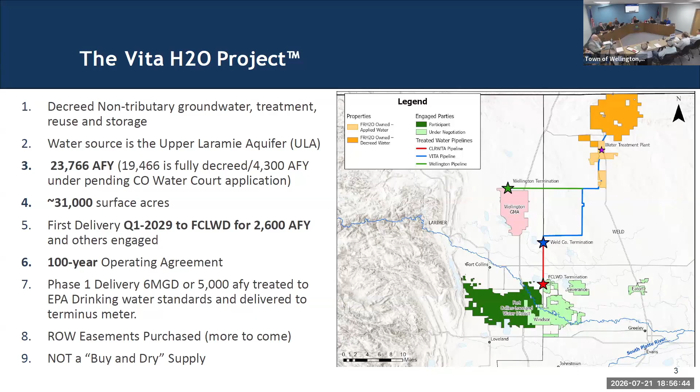Let's talk about the ULA quickly. It's unaffected by drought and hydrological variability. This roughly starts about 150 feet down and goes all the way another 600 feet, so total depth to our wells will be about 800 feet—some a little deeper up on Lazy D, just because it's the higher elevation.

The consistent water quality, as I said earlier, it's an ancient water quality. It is very, very good water. The one element is the uranium, but it measured out fine in our full test. We have done thousands of tests and our pilot treatment test.

We essentially followed very much what Greeley did with Terry Ranch—it's the same team, the LRE team, Spheros is formerly LRE. So we followed the same path, didn't try to reinvent the wheel. We just completed that, and as I told Meagan, those reports we'll be glad to share with you guys: full piloting of the WRT technology, plus lots and lots of lab results from all our wells, which I'll talk about in a minute.

Very good water. Again, conjunctive use—I've said enough on that. It does allow incredible flexibility, reliability, and firming. As I said, the water is bankable, so it's stored until needed. We've talked about the extent of reuse and recharge, and again, fully consumable water supplies. This is a consistent theme.

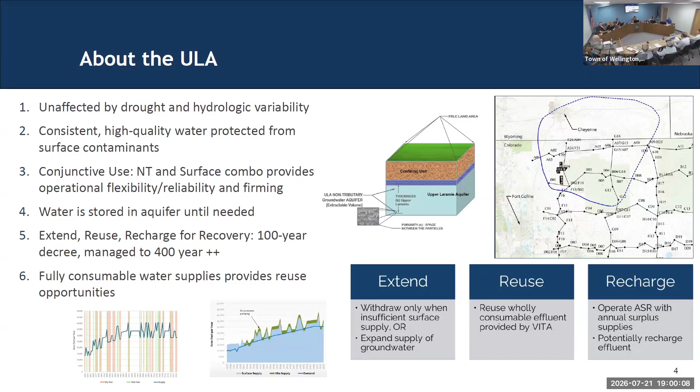Project design highlights - some of this I've already talked about. The average total depth is around 800 feet, and we'll manage them in the 400 GPM range.

We've got a really good hydrology team. Fort Collins Loveland Water District brought on Tom Sayer, if you guys know him. He's pretty well respected and well known. We're glad to have Tom on the team, so that's all part of the well design group. We're really happy to have him.

As I said earlier, the wells are being designed bidirectional and designed with ASR. One of the things in a classic groundwater well is you can use silica sand to pack around the filters that suck the water in, or you can use glass beads. Glass beads are specifically designed for ASR, so it's friendly to reverse the pumps and push the water back into the system. We're going to use glass beads, which are more expensive, but that's what it means about the wells being designed for ASR in the future.

The main trunk line, the blue line I mentioned, is 24 MGD. Again, it's gravity fed. The good news at least to Wellington is that can also be gravity fed, so we'll have the pumps pushing, but it'll be gravity fed.

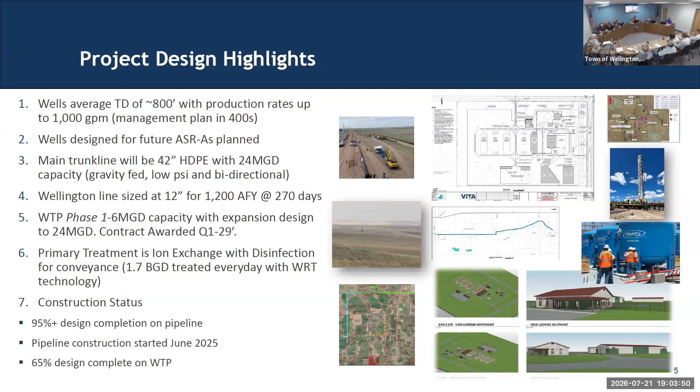One of the rules we have is: look out for the blind spots. And by the way, check your ego at the door. Our team is really good at that, and I'm pretty proud of them for it.

That's it. I want to emphasize, I have lots and lots of technical data and good reports, and some other slides we can share as part of the backup, but Meagan said I had 15 to 20 minutes, so I tried to keep it as short as I could. We're open for questions, and certainly can go back to anything else you guys might have.

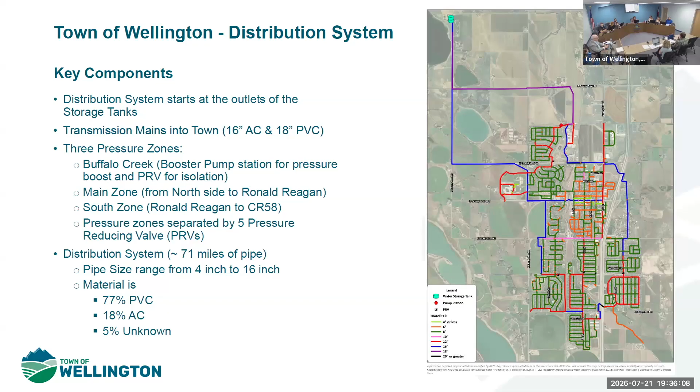One of the great things about our system is it's mostly made up of 8-inch or larger PVC pipe. Smaller diameter pipe, 8 inches and less, is typically the older pipe. That's where we see a lot of our asbestos cement pipe, specifically within Old Town. All the new developments have PVC pipe, which is great. That's the industry standard. The AC pipe is what we'd be looking to phase out over time.

Before I get into the project scope, I want to touch briefly on what a distribution master plan is supposed to be. It is a long-term planning document that provides an assessment of the existing distribution system in terms of existing capacity, operational efficiency, as well as looks towards future growth scenarios and identifies potential operational and hydraulic deficiencies, and lastly, develops capital improvement projects to support long-term growth and remedy those identified deficiencies.

That being said, the scope of this project had 3 main tasks. We had a water model update and calibration, and then we had water system planning, which consisted of several tasks that I'll discuss in the coming slides. And lastly, we had the master plan report.

Starting with the water model update and calibration, the original water model was prepared back in 2020 using existing GIS data sets and limited water meter data, customer information, consumption data. The model update effort upgraded the software to the current modeling standard and revised and updated the demand allocations within the model based on customer usage data and plant production data.

New diurnal curves were developed based on the usage data. Diurnal curves, which you'll see here on the slide, show the usage of water throughout a 24-hour period. The idea behind them is that usage is not constant, but that people and systems use water in a very predictable pattern that can be applied within the model to vary demands throughout the day. It is typical to have multiple diurnal curves within your model based off of the scenario that you're running. In our case, we have diurnal patterns for winter usage and summer usage, as well as average usage. And the key difference there is obviously your irrigation demand in the summer.

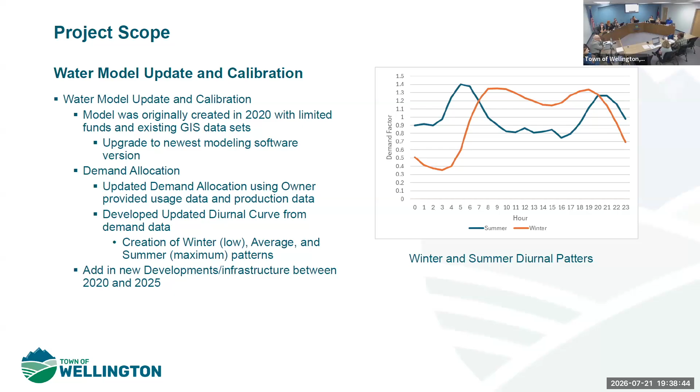The model was also updated to include new developments that have occurred between 2020 and 2025, and it also included an update to the hydraulic characteristics of the main treatment plant as well as the nano facility. When the model was originally developed, I didn't have funds to go in detail there, so I said just put a valve and say the production is X. And now we've got pump curves and everything else in there, so it's more realistic.

Moving on to calibration. The model is calibrated in a number of ways, but the most basic is to open up a hydrant and run it. Put a flow meter on it, measure pressures throughout the system, and we take those numbers back, send it to the consultant, and then they compare it to the model results for the same hydrant flow. And you hope that they're very similar. If not, you adjust the model.

Once calibrated, the model scenarios are then built, which in this project included a maximum day, which would be sometime in the summer, minimum day, which is typically winter usage, average day, which I call shoulder season, that's spring, fall usage. And then we have our two future growth scenarios of 2030, which at the time was intended to be a 5-year scenario - now it's more like a 4-year scenario - and 2045, which is a 20-year scenario.

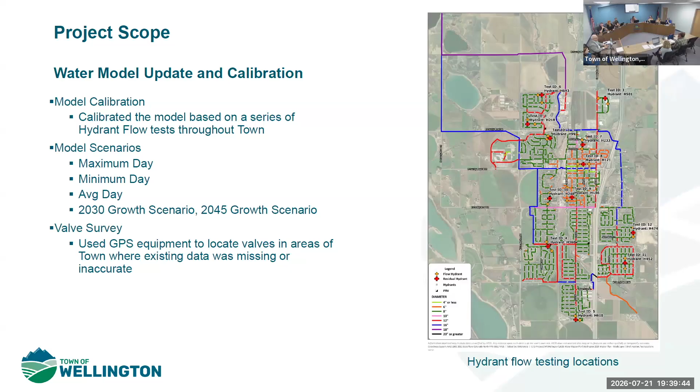The water system planning task started with an existing conditions analysis. The consultant looked at key information for the distribution system, including pipe age, break history, and pipe material. We always knock on wood when we say break history, because we don't really have a lot of it.

Through the various model outputs, the consultant is able to review the hydraulic performance of the system, looking at key indicators, primarily velocity. Velocity is an indicator of excessive head loss within a system. You want lower velocity and larger pipe for less head loss, so the lower your velocity, the better performance. You typically look to have 10 feet per second or less, otherwise you need to upsize your pipes.

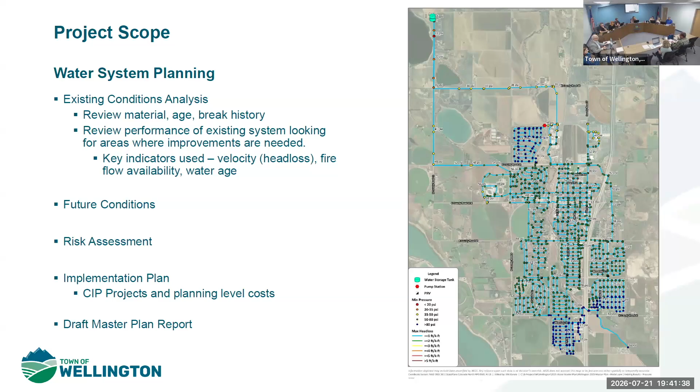They also looked at fire flow availability and water age. Included with this planning task was the development of future conditions growth scenarios created in the model, which we'll detail in coming slides. They also completed a risk assessment, which was one of the easier tasks. With a relatively new system and minimal break history, nothing major was found other than the older AC pipe throughout Old Town. As part of this task, they came up with an implementation plan identifying projects to accommodate future growth and address issues in the existing system. Lastly, there's the master plan report, which will be finalized after this presentation.

So let's talk model results.

Starting with the existing conditions analysis, the good news is there aren't really any major deficiencies identified other than the older, smaller diameter asbestos cement pipe within Old Town. There are two minor deficiencies, which I'll talk briefly about: the Buffalo Creek pump station, and a pressure zone issue down in Sage Meadows.

The Buffalo Creek booster station is located north of Wellington Community Park, in a small fenced-off building you wouldn't recognize. As mentioned previously, it provides boosted pressure only to the Buffalo Creek subdivision, which is separated by valves from the rest of the distribution system. The pump station is what I'd consider a dumb station: there's no control logic, no motor speed controls. It's either on or off, and controlled daily by C&D staff with manual switching of the duty and standby pumps. There's no SCADA remote control or visibility on this station, so we rely on manual operation and daily interaction to keep it functioning.

The operation of this pump station isn't ideal, but if and when growth occurs to the north, new pressure zones would be developed, and the intent would be to phase out this pump station.

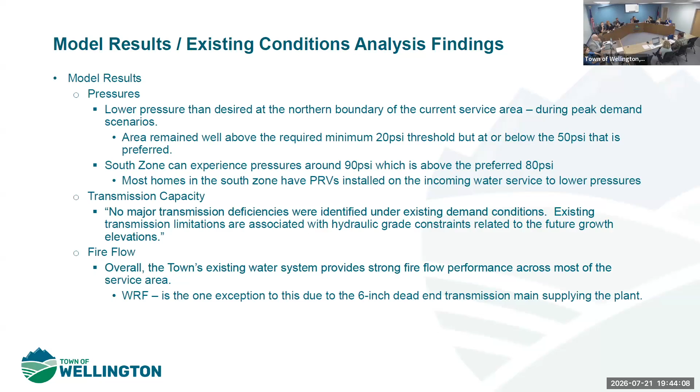Now moving on to the future growth scenarios. These growth scenarios are referred to by the year 2030 and 2045. They were developed using future land use maps in conjunction with the demand projections developed in the 2024 West Water Demand Analysis. Future land use classifications were mapped to a water use classification, and the demands were applied within the model using the best estimated location of that growth.

For the 2030 scenario, we assumed growth area number 1 would be the most likely to occur within the next 5 years. So 2030 looks at areas for growth much closer to town limits, with 2045 looking at growth further north between current town limits and Owl Canyon — that would be growth areas 2 through 4.

In addition to the future growth scenario, we included an analysis of the potential to accommodate an alternative water supply, the VITA project, which you just heard about, entering the town from the north. The analysis included consideration of the infrastructure needs to fully utilize and integrate this alternative source within the distribution system.

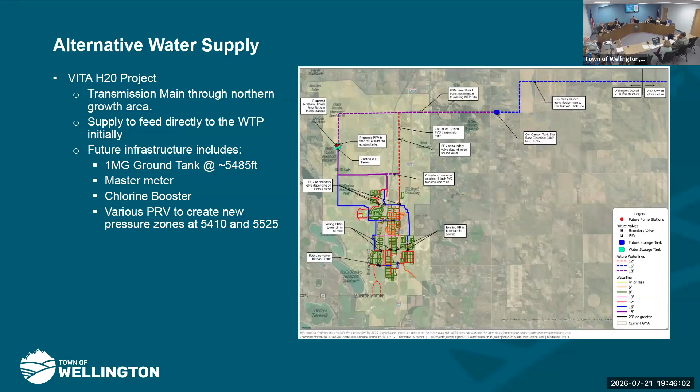Moving on to project recommendations. The 2030 scenario doesn't have a slide.

I'm intentionally not discussing these in detail because, as previously stated, the existing distribution system doesn't have many issues. There's the South Zone PRV issue that I mentioned, and then there is the need to plan for the aging asbestos cement pipe. But the great thing about AC pipe is if you keep using it, keep it wet, and don't bother it, it usually behaves itself. It doesn't break. We don't have a big break history here.

But the plan should be to budget for the replacement each year, just some percentage, so you don't fall behind. The work, in theory, should coordinate with other utility and infrastructure work to share the cost of road repair between the projects and the various funds. Typically with utility work, you see your biggest expense coming from putting the road back together, which is interesting.

Project recommendations for the 2045 scenario. These projects were developed to meet the needs of growth while also being able to function with or without the VITA project. Two new pressure zones are needed at hydraulic grade of 5410 and 5525. To serve these higher pressure zones, the master plan recommends a new pump station at the water treatment plant. This would create a pump zone similar to the way that Buffalo Creek operates now, but with pumps sized for peak demand and fire flow.

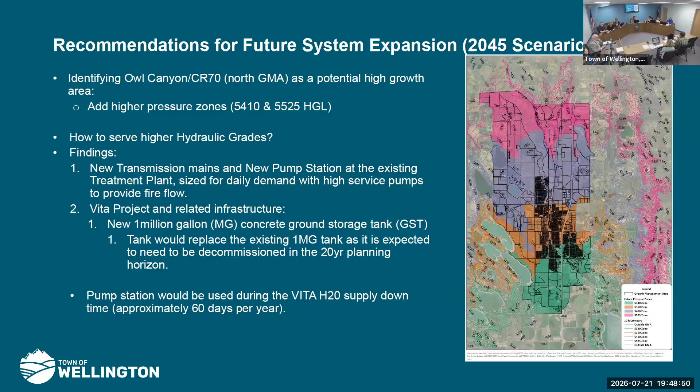All of that leads us into our recommended capital projects. In the near term, 5 to 10 years, budgeting for the yearly replacement of the older asbestos cement transmission main and the distribution pipes. There is a need for the new PRV down in the Sage Meadows area.

I hadn't mentioned this before, but it is in the master plan. There is a project shown as additional looping of distribution lines under the train tracks south of the proposed Sage Farms project.

This is envisioned as a development-driven project. It's not something that is necessary. It's nice to have if development occurs on both sides of those tracks, we'll want that. There is a future sanitary sewer outfall that is being looked at currently going under the tracks, and I would envision that if you're going under the tracks once, you do one permitted project and get both of those pipelines permitted at the same time.

Like I said, that's really a kind of a development-driven project, so it's not something that I spoke a lot about.

In long-term growth, what we're looking at is the Northern Growth Area Booster Pump Station. We would also envision decommissioning the Buffalo Creek Booster Pump Station. There are the various VITA transmission mains, which you can see on that drawing there to your right.

There's the Northern Pressure Zone PRV stations, and there's the continued budgeting for replacement of the asbestos transmission main and the distribution pipes. There's also the decommissioning of the 1 million gallon storage tank, as well as a new 1 million gallon ground storage tank somewhere along the VITA pipeline.

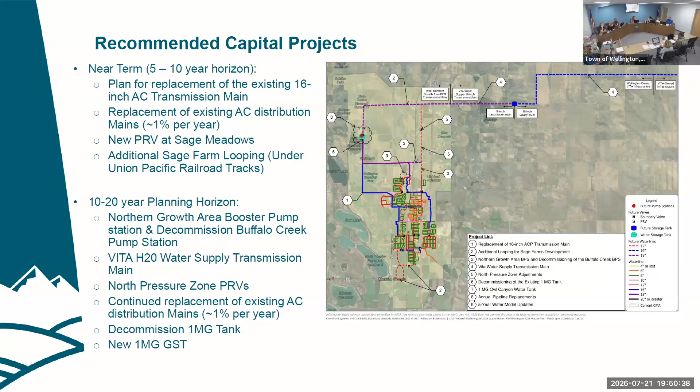With that being said, I'll stand for any questions or comments.

I'm so very happy that we are doing a working session on both of these items at the same session, because it kind of puts a whole picture together. So I appreciate that. The first thing I want to say is the word asbestos always makes me a little nervous, but I'm glad to hear that that's not necessarily a risk. But planning to replace that sounds great.

I live downtown. My water seems fine. And then I guess the other thing is it's constantly in the news all summer long. I follow all kinds of different towns and cities around Colorado and beyond, and it's like water main break after water main break. So I'm just curious, obviously that hasn't been the case now, but what happens when that occurs?

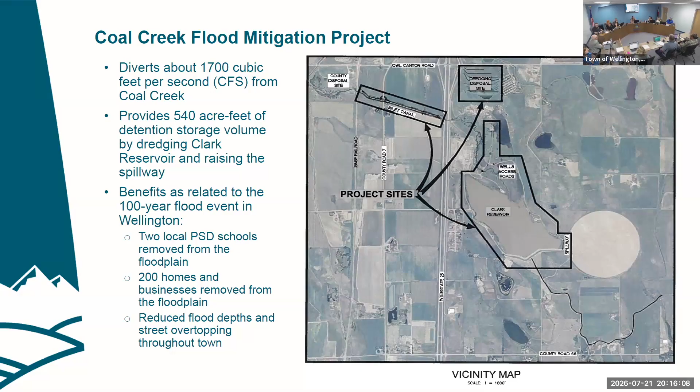What made that possible was enlarging the Inlet Canal. Both of those facilities are owned by North Poudre Irrigation Company, so they were something of a partner on these original projects. I'll talk a little more about the Inlet Canal specifically.

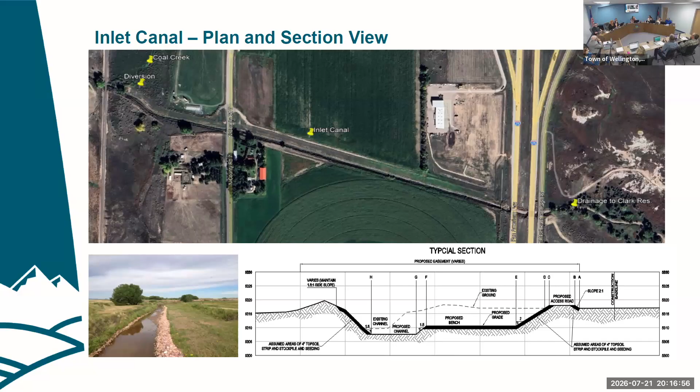Once it gets there — you can see on this map, that's Owl Canyon just to the north, that's the interchange of Owl Canyon you're looking at — it discharges east across I-25 and over to Clark, which isn't a whole lot to see in this one.

The project in Clark itself included dredging a lot of material. It's basically a wet pond, a retention ditch, a water supply reservoir, and raising the spillway a little bit to create more volume. All that detention is required in order to release those flows, which used to come to Wellington, safely to a point south on the east side of the freeway.

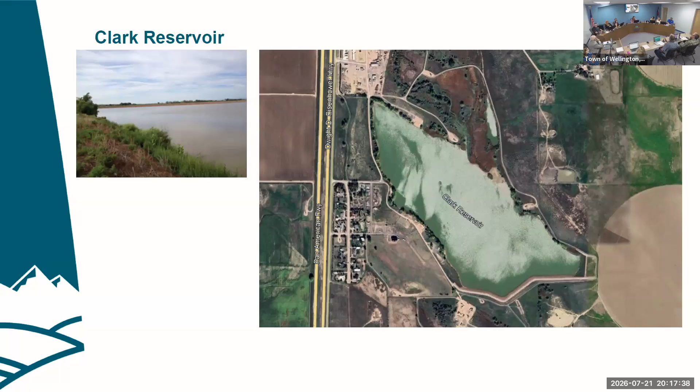So sometimes you hear those called the upper basin improvements. I really just think of them as our improvements.

So all of these projects benefit Fort Collins, Larimer County, and to some degree Timnath. But it's really only those upper basin projects that benefit us, which led us to 2017, when former town administrator Cannon and Mayor Tim Singwald put together that 2017 agreement and got it approved.

What that 2017 agreement does is limit our financial responsibility for the East Side Detention projects, and also lay out a path to ultimately dissolve the authority once certain conditions were met.

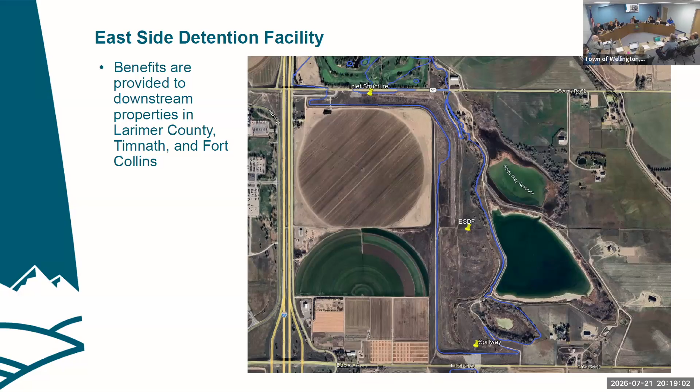Those conditions are quite lengthy, but in general they include completing the projects, paying off any loans — there were some CWCB loans taken for the projects — and distributing assets of the authority back to the members.

Remember, this is how it's set up: the members — those three entities in the original IGA — hired the authority to run it for them. So it's the members that need to dissolve the authority, because we're the ones that signed the IGA.

So our representatives on the board of directors have been talking for quite some time about an early termination to the authority. I think you've all heard those conversations. About, I'd say 6-8 months ago, the audit committee was tasked with working through all the requirements to actually do that.

And the audit committee previously had a pretty limited role. It was really to review the audits and advise the members and the authority. But that mission has changed a little bit, and we are starting to look at what it would take to dissolve. There's going to be some real challenges here.

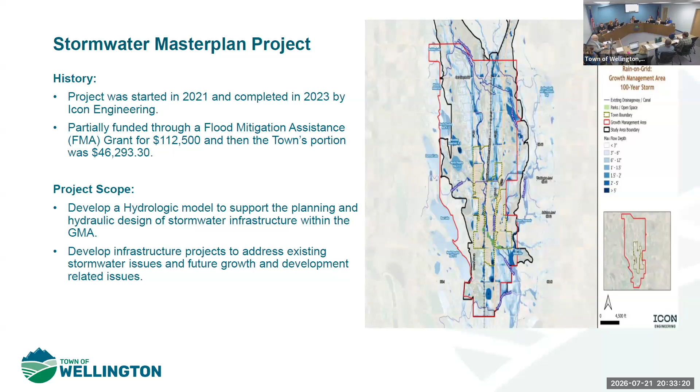Framework for prioritizing future stormwater capital improvements and establishes a long-term strategy for addressing identified drainage deficiencies.

The primary objective of the alternatives analysis was to identify practical and cost-effective solutions that would improve stormwater conveyance, reduce flooding impacts to homes and businesses, and bring the town's drainage infrastructure into compliance with current stormwater design criteria. Particular emphasis was placed on reducing flood risks to insurable structures. Throughout the evaluation process, town staff worked closely with the project team to establish design criteria, review potential mitigation strategies, and identify constraints within the existing public right-of-way, minimizing impacts to private property and reducing implementation complexity.

The alternatives can be put into two broad categories. I call it the Old Town alternatives, which are within the existing historical developments, also known as Old Town Wellington, and then also GMA alternatives that are located within undeveloped areas of the GMA. I hope when I say GMA, it's growth management area - I don't know that I've said that yet tonight. The final design and construction of these GMA alternatives is typically handled through development as part of the development process.

I did want to briefly touch on what an outfall is, because you're going to see that used loosely throughout this presentation. An outfall is just a system of pipes, storm drains, channels that convey water from one location to a natural drainage feature such as Boxelder Creek or Coal Creek.

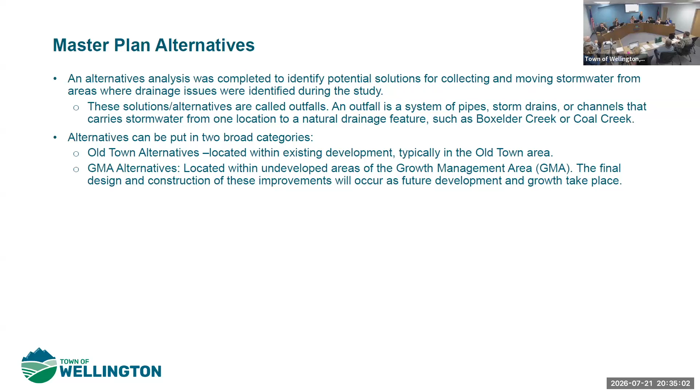With that, I'll jump straight into talking about the projects. If you do read the master plan, which is available on the town's website, you will see a lot of discussion about the different variations within each project. Most of the variations are based off of the design storm being used.

Trustee Blackstone brought up a great point. The 100-year nomenclature typically isn't used any longer because it implies a 100-year reoccurrence, and that's not really true. So we usually use the 1% or 0.1% or whatever that fraction may be when describing the storm events. However, since I'm used to it tonight, I'm going to stick to saying 2-year and 10-year storm events. I don't know the math there, sorry.

Starting with Washington Avenue outfall. This is a large box culvert upstream of the Windsor Ditch on the north side of Washington Avenue. This is envisioned to convey runoff from the Bonfire subdivision and future development north of Washington Avenue, and provides conveyance of Coal Creek flows that are coming into town over to the Boxelder Creek rather than through Old Town.

This is probably the most expensive alternative that was considered during the project. I would consider this to be partially development driven, as there is an undeveloped lot up there that would have to do something, because there is a large floodplain and ponding area that was identified that occurs on that property. So in order to develop it, the floodplain would need to be addressed, and it could be through participation in this project.

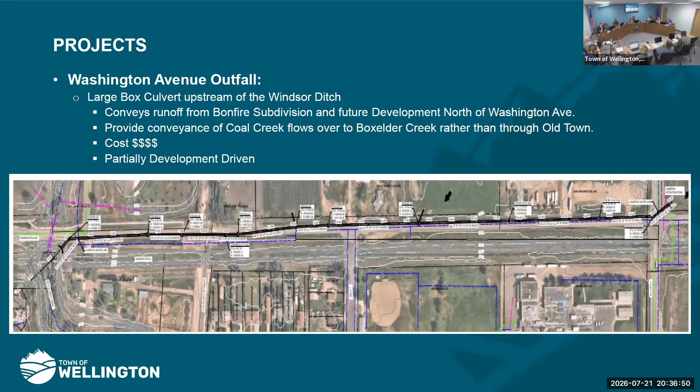Next project is the Boxelder Business Park outfall. Similar to the Washington Avenue outfall, this project is envisioned to intercept Coal Creek flows north of town and convey them to Boxelder Creek. This one is smaller in scope. It can also be development driven if development comes in north of the Boxelder Business Park.

Similarly, it includes a large diameter culvert from Coal Creek over to Boxelder Creek. Many of these projects were envisioned to work in conjunction with each other rather than one large stormwater conveyance structure. We take a little bite out of it at every chance we get, so that we don't have such a large capital investment all at once. However, this one is also the second most expensive project, and typically those costs come from just trying to tunnel underneath the train tracks. With large diameter culverts, you're looking more at like a micro tunnel rather than just a bore.

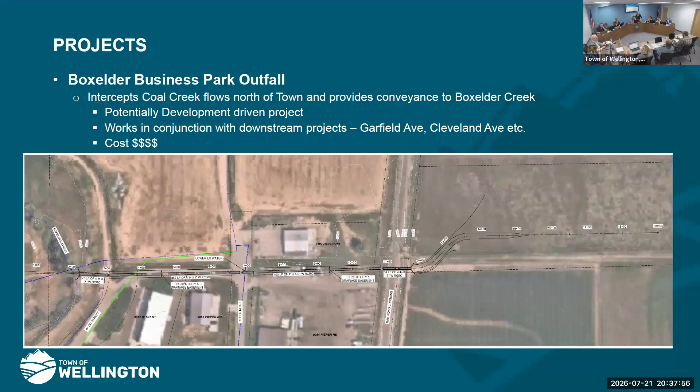So the next slide would be the Garfield Avenue outfall. This one is the first Old Town project on the list. There is an existing storm drain system along Garfield. When it was analyzed back in 2023, it was determined to have additional capacity. That additional capacity could be utilized through installation of multiple inlets along the alignment. This would alleviate some localized flooding within Garfield upstream of Cleveland Avenue.

This is actually one of the cheapest of all the projects, with your primary cost coming from putting the road back together and putting the sidewalks back together. But there's no new pipe that's going into the ground, it's just new inlets.

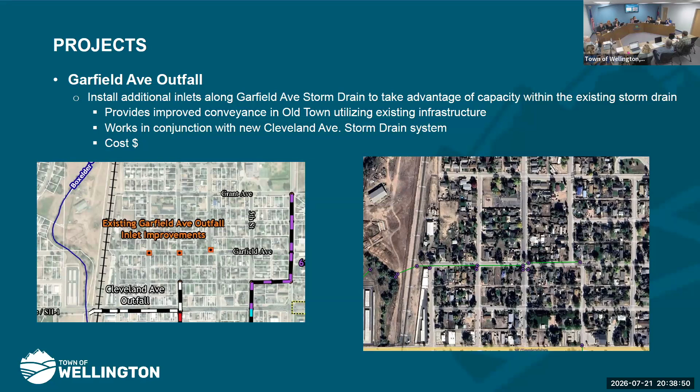Next project, this one's very familiar. Technically started this week. The Cleveland Avenue outfall, which is part of the Cleveland Avenue reconstruction project.

It was in the master plan, it was envisioned in the master plan. If you read the master plan report, you'll see there's several alternatives that are identified, you know, perhaps taking it rather to Coal Creek, or to the west to Boxelder Creek.

There's an alternative where it takes it down 3rd Street and then to the Lincoln Avenue outfall. This is a good example of how these projects come to fruition. When we got the grant money for the Cleveland Avenue project, we knew the storm drain needed to be a part of it. We still had Icon on board finishing up the master plan project. They went ahead and looked at all the alternatives, as well as the town's design criteria, as well as the additional hydraulic restrictions

So from there, Icon took all the alternatives, distilled it down into a report, which was basically their recommendation of the preferred alignment. Town staff reviewed it, myself, Bob, as well as CDOT Hydraulics, and it was approved.

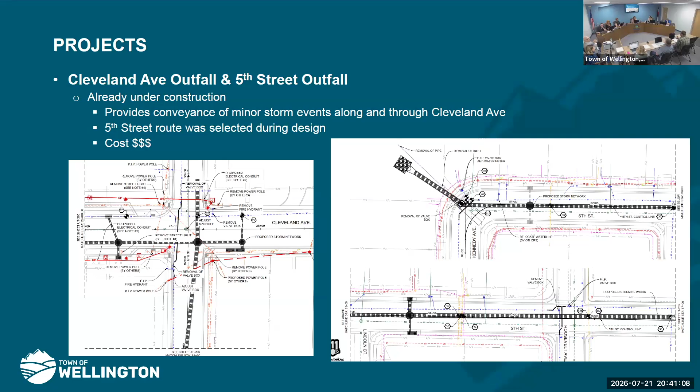Moving on, the 6th Street outfall. This was envisioned as collecting stormwater runoff north of Cleveland along 6th Street, primarily looking at a drainage outfall for the Thimmig and Church properties, those empty parcels across from the Eyestone campuses. This is envisioned to tie into the 5th Street outfall north of Cleveland. Like I said, the stub outs will be installed later this month, as the stub outs will get us outside of CDOT right of way, and then we don't have to worry about CDOT permitting for this future project.

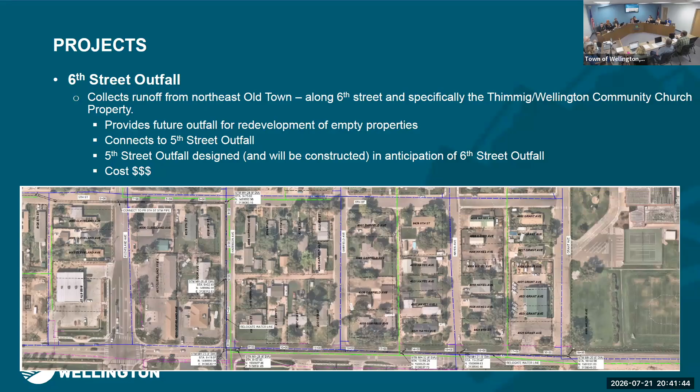The next project is within Old Town, in Mae Court. There is an existing 12-inch diameter RCP there. The idea is to increase the pipe size to allow for more capacity and conveyance, and less localized flooding on the streets through there. This is a small cost project, but it really only impacts this small area on South 3rd Street.

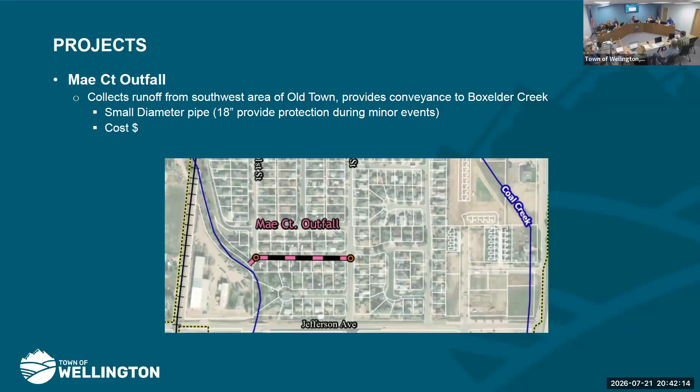Next project is the Sveta Lane outfall. This is an interesting Old Town project in that it could potentially be constructed in coordination with some development. This is an identified problem area along Coal Creek where runoff outfalls to the historic channel, but there is no conveyance to get that runoff to the channel that starts south of Jefferson and east of Ridley's. There's just a gap in stormwater conveyance in this 2-block section.

There's also a large floodplain piece through here. Those two lots located on Sveta are zoned commercial, I believe, at the corner of Sixth Street and Jefferson, and Sveta's in there as well. We've had several conversations with developers, and this always seems to be a sticking point as far as getting these two lots developed. So there could be potential for partnership with a development.

Obviously, to mitigate the floodplain, you're looking at more of a FEMA process with a CLOMR and LOMR, but it's all doable. Too many letters. Conditional letter of map revision and letter of map revision. Thank you, Meagan.

So you do the conditional saying this is what we're going to do, and then you do the letter afterwards saying this is what we did, and the maps should change now. FEMA, please change your floodplain. It's an intensive process.

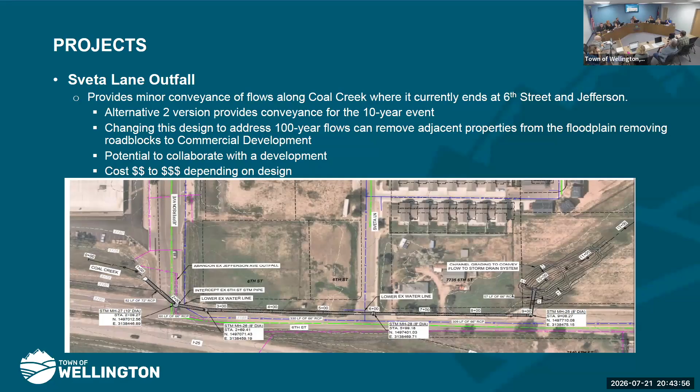Another project identified is the Buffalo Creek Wellington Community Park area. This is intended to address flooding along Wild West Lane and Buffalo Creek Parkway intersections. This would construct a new storm drain segment as well as install new inlets and upsize existing storm drain pipe. I think it's important to note that this will not address the residential structures within Buffalo Creek that are located within the floodplain.

To adequately address that issue, you're looking at a new structure under Washington Avenue with Boxelder, because that's mostly backwater from the Boxelder Creek.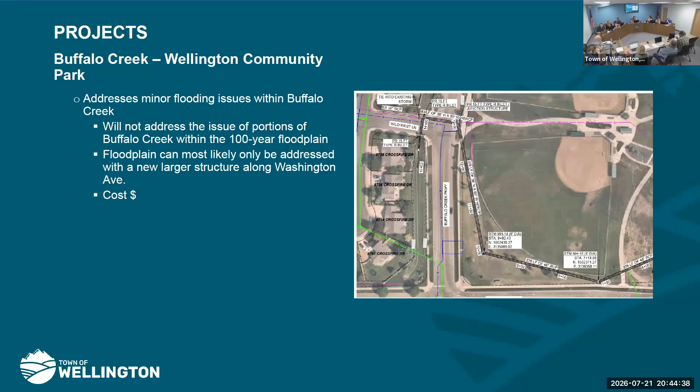Now moving on to the GMA projects. I don't want to spend too much time on these. These are really development driven projects. They're not needed, and they're not going to come into any sort of fruition until developments come in.

The best example is the Saddleback outfall. When those plans were going through the development process, the master plan was already completed. The Saddleback outfall through Saddleback is in the approved plan set, so that portion of the channel will be constructed with Saddleback. There's a portion of it north of Ronald Reagan that's yet to come to fruition when a development comes through on the north side of Ronald Reagan there.

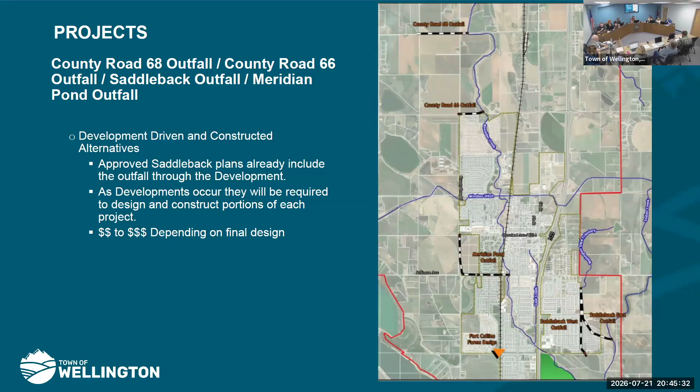Now to touch briefly on what I mentioned at the start, there's a lot of discussion about the alternatives being split into alternative 1 and 2, 3 and 4, and they're referencing minor storm conveyance of the 2-year storm event. What they reference as flood mitigation is really the 10-year storm event. And then, as I said earlier, floodplains are based on the 100-year storm event, or the 1%.

There's different variations for all these projects within here. For reference, I should add that residential developments must detain the 2-year and the 100-year historical events, and release them at the 2-year and 100-year historical rate. Commercial, it's the 10-year and 100-year design events. And then new streets are required to design for the minor and major event, which is the 2-year and the 100-year. So really the only thing we're not getting to is that 100-year design event.

That's really cost prohibitive. There's not a lot of those designs unless they're specifically intended to be flood control structures like the B dams. A 100-year event's just not a design storm for this type of infrastructure.

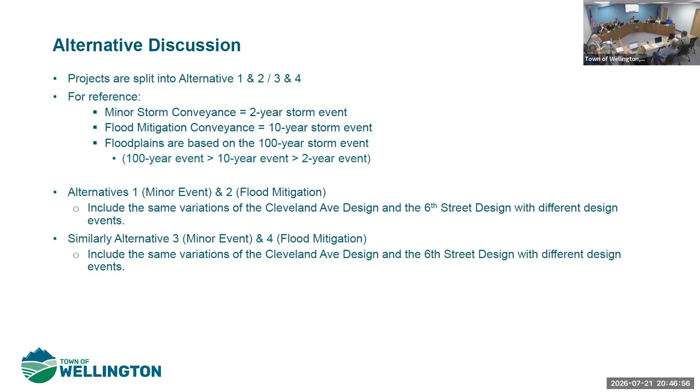With that, I will stand for questions and comments. If there's anything that maybe you all have identified, or the board has identified, that we should look into, I'd be willing to do that as well. These were the projects identified in the master plan, but there certainly could be others out there that perhaps were missed, and I'd take that feedback now.

So obviously Cleveland Avenue wasn't a high priority, but we had the opportunity in which the road would be pulled up. So why would you not do that for cost savings and to finish that project and avoid tearing up a road in the future? Right? So in my mind, those are the kind of opportunities maybe that we should look for. And I don't know how this works.